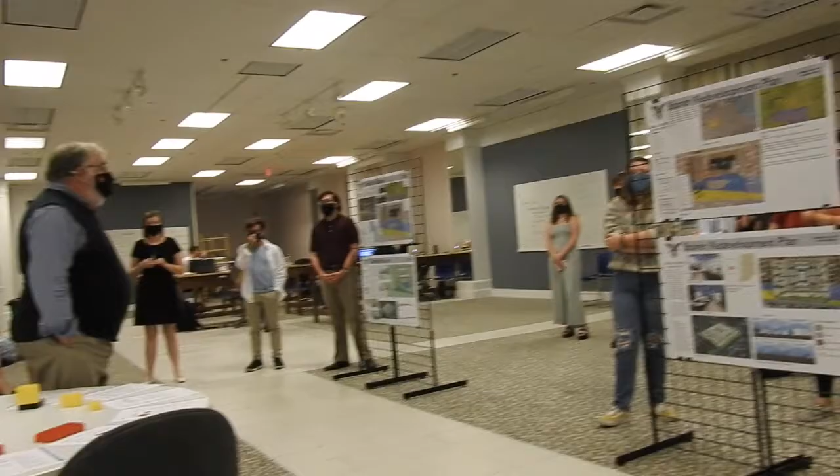The purpose of this storefront is to begin to help us as a department engage better with the community. The long-term outcome, depending on how it all works, would be to have a permanent facility where we could run both internships and employment opportunities during the semester, where students could be working on projects as well as classroom work.

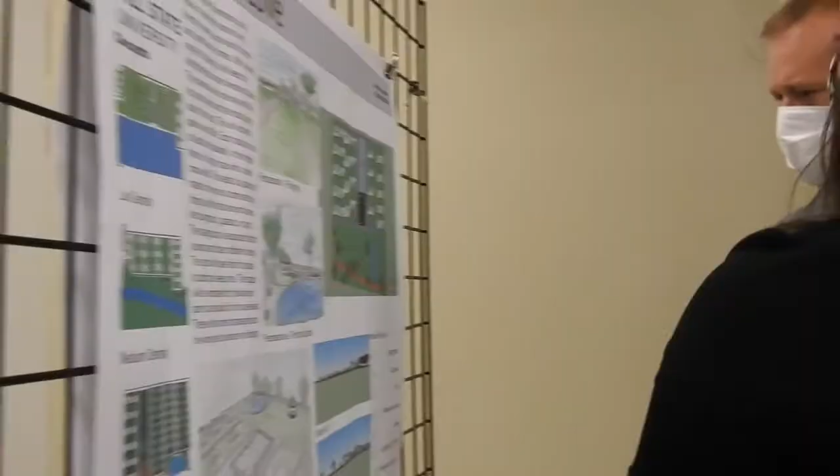The idea of this storefront, especially with COVID issues, is that it gives us a place to have larger meetings. There have been two meetings in here already, with the third one done, in which we've had over 40 people, and we can accommodate that with a safe distance approach.

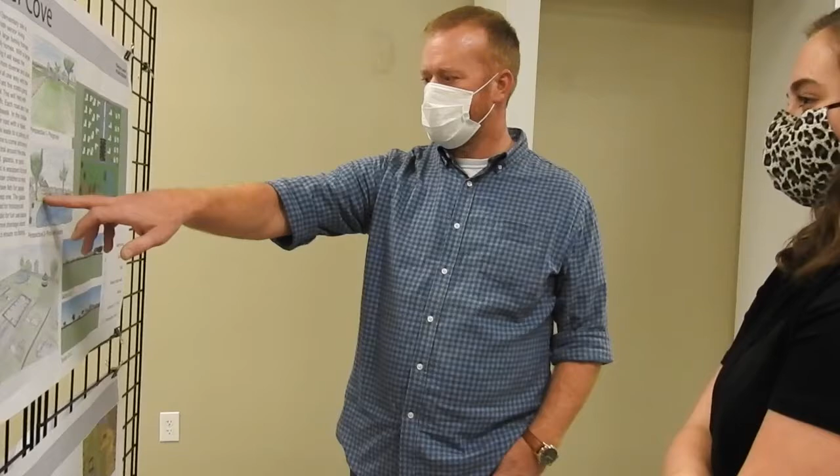We really like this facility, and it will continue to evolve, hopefully with displays of all kinds of projects, not just Ball State projects but all kinds of community projects that are underway. We want to build this as a destination for people to come and get information and learn not only about what we do, but also what's happening in Muncie.

So today, for this exhibit, we've invited the mayor and the neighborhood folks to come by. We're doing this as gallery style, which means you're standing by your project and answering questions.

Hello, my name is Elise Jones, and I am part of the PLAN202 Studio. We're going to run through the old Storer site.

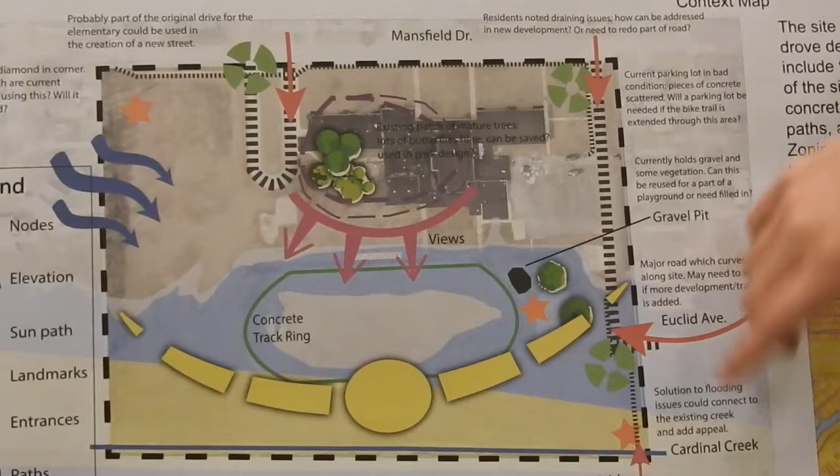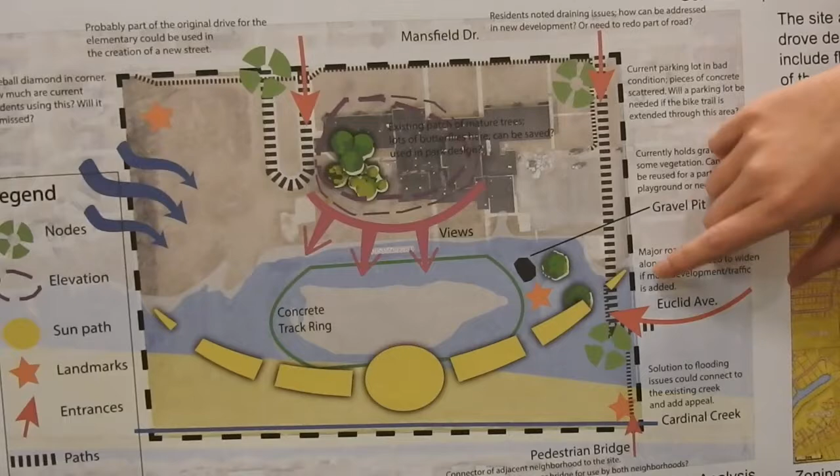Some things I found really important on the site were obviously the floodplain on the lower half, as well as flooding from Mansfield Drive. Current uses of the site include a ball diamond over here, as well as some paths along the side. Existing trees were considered for keeping or removing, and there are views of the lower elevation on the lower site here.

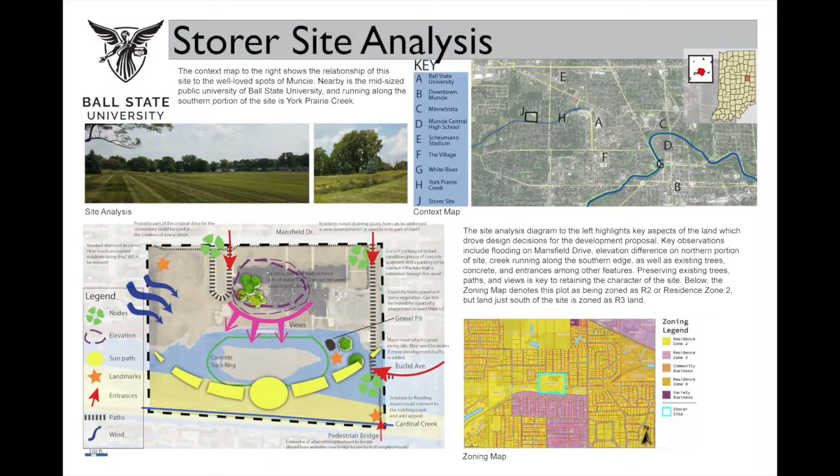Moving up to my design for my master plan, I kept all the residential homes in the northern portion just to protect them from that floodplain. To attack the flood issues on Mansfield Drive, I implemented a dry bed, two of them actually, that would run north-south and down into this retention pond.

The dry bed will be a collection of rocks and other natural plants that would soak up the water, but also take it down and completely fix that issue for current residents as well as future residents of the site. I also have a playground that would be...

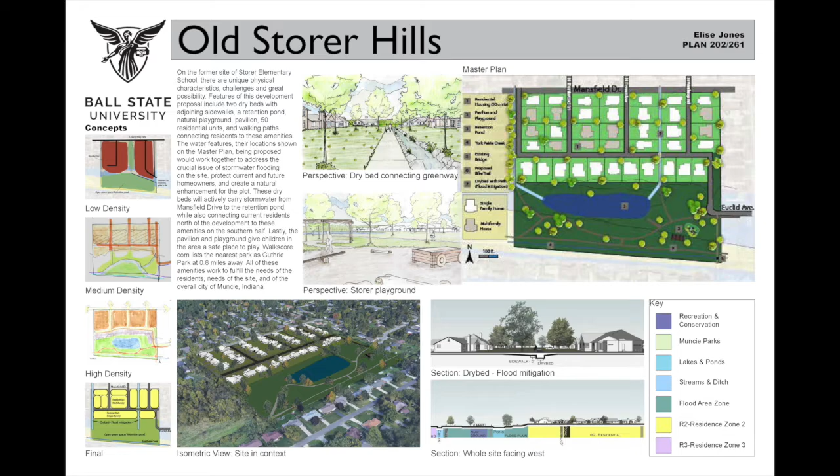...mostly natural features, kind of a natural playground, both sustainable and low budget. And then the dry bed here shows how the sidewalk borders the dry bed, leading all the way down to the southern portion of the site.

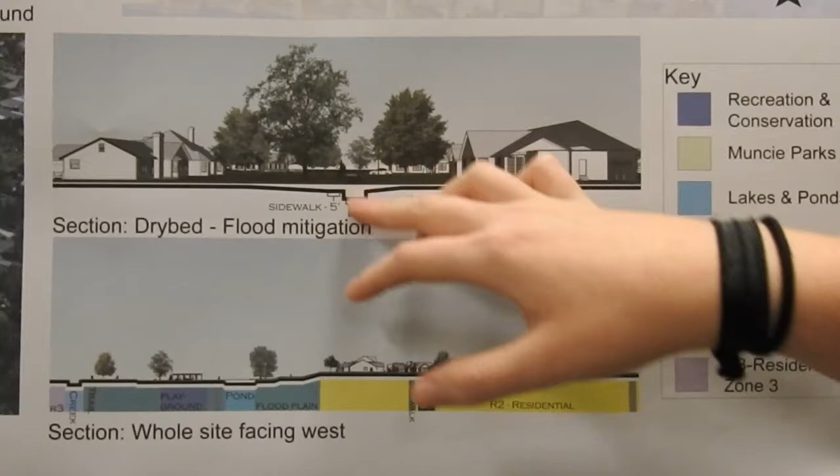There's more information here, and the elevations show how the dry bed works. It's lower, comes down, collects that water, and brings it where it needs to be and not on the street. This shows how it turns from residential down to open space for all the residents in the area.

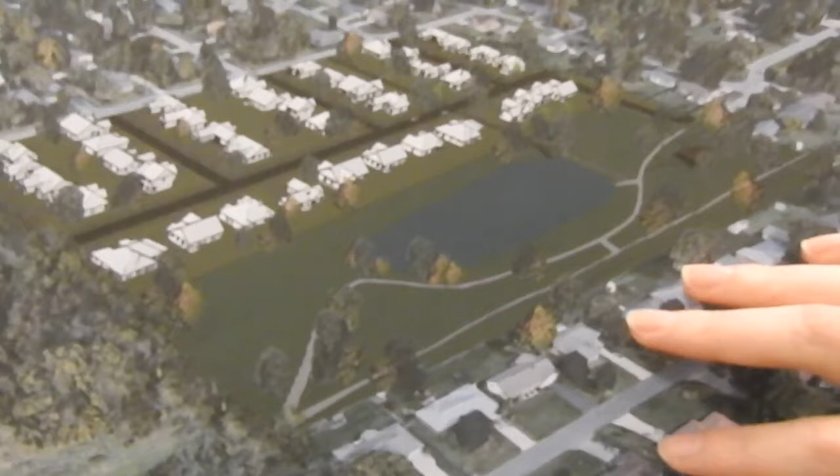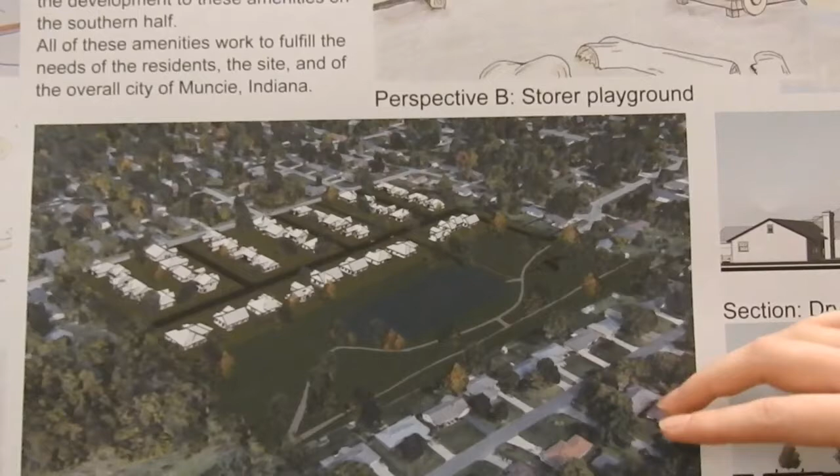The aerial here shows detail of the pond and how the residents can interact with it through the sidewalk. The houses on the northern portion stay away from that floodplain, and it matches the neighborhood while deviating a bit to try something new, but still matching the context of the site. So that was my design process and how I tried to attack current issues while also creating a new community.

Hello, my name's Enzo, and right over here is my project for the Storer Elementary site. First, I want to introduce you to the site analysis and the details of the site.

What's very important about the site is the slope, the topography, where the slope goes from high to low. Mansfield Drive is up north over here, and then the topography slowly slopes down.

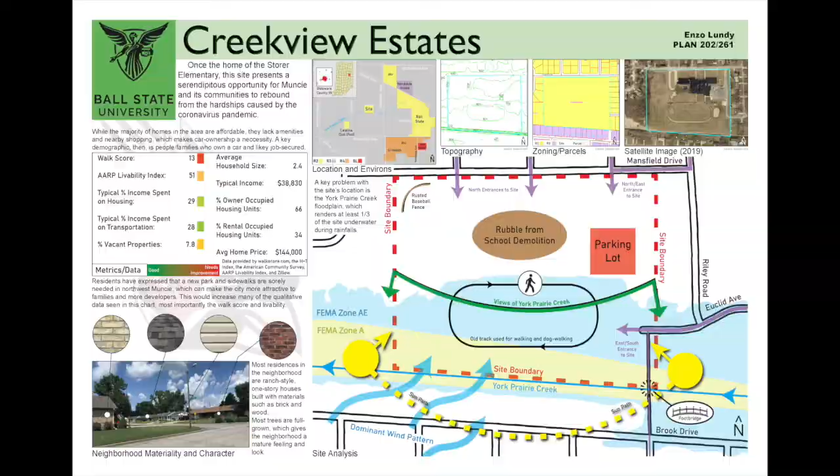A characteristic and concern that the community had was the materiality and how the development would fit into the context of the site. So I included a graphic here showing all of the elements and materials that would be used in the new development houses. Taking that into account, we'll move to our site plan.

The site plan has 24 ranch houses, a little pocket neighborhood, which I'll explain later, and a smaller scale senior living center, along with a retention pond and a neighborhood park over here.

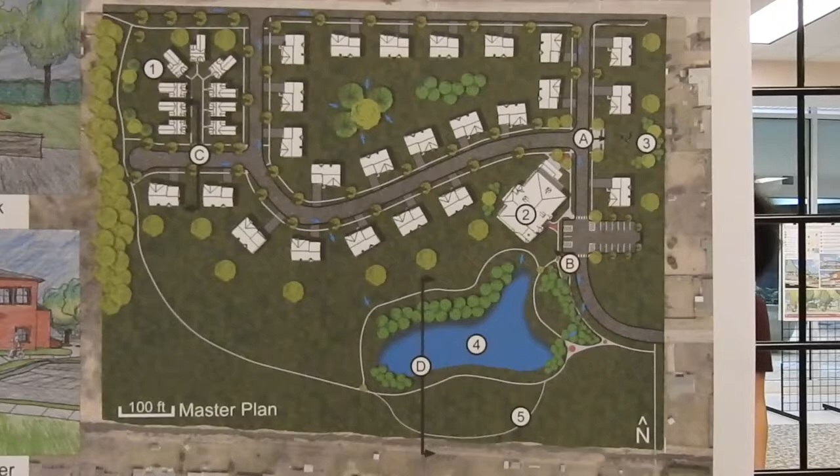And then we move into the neighborhood park over here, which would be a new amenity for the neighborhood. There is also a trail on the master plan that goes from the existing neighborhood all the way down to the retention pond. The retention pond, as you see in the plan, would catch water runoff from the new development. See the arrows.

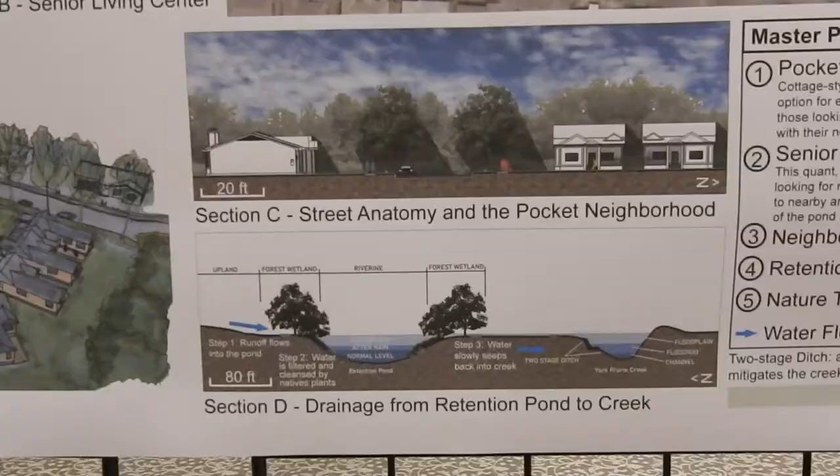And also, if we go down to section D right here, there's 3 steps to the retention pond. Step 1 is the runoff flows into the pond. It gets cleaned and cleansed by native plants that we plant there. And then the final step would be the water slowly seeping back into the creek.

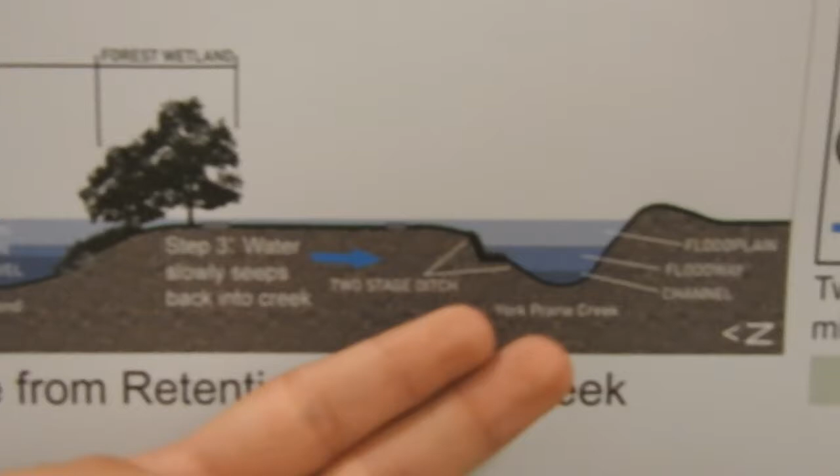So this retention pond would not only increase the property values for the development around the neighborhood, it would also take care of some of the flooding issues and problems that current residents experience.

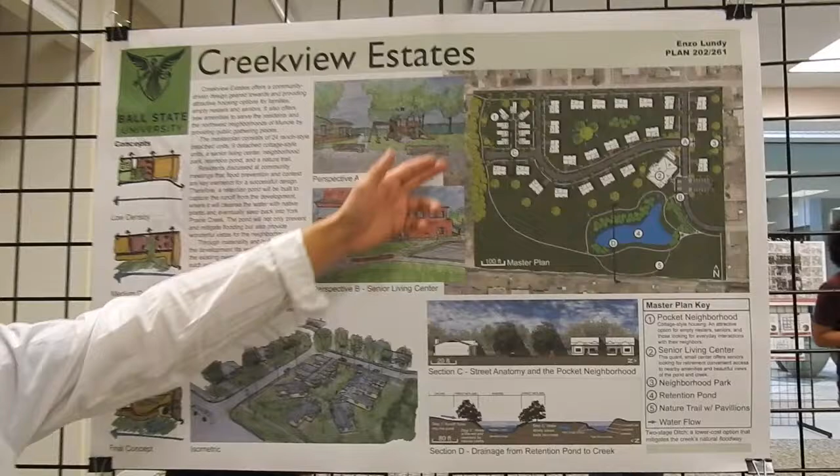The other feature that I want to note is the pocket neighborhood, as we saw. There are 9 of those small cottage-style houses. If we go down to the isometric view right here, you can see a more detailed picture. So I decided to add these cottage-style homes because they not only make the area more affordable, but they're also very attractive for empty nesters and seniors who are retired.

And these pocket neighborhoods, the best thing about them is that they give a more intimate sense of a community. And so to wrap it up, the development really does seek to provide a more intimate sense of neighborhood while giving new residents and existing residents more amenities to enjoy and hopefully live a better and healthy lifestyle. Thank you.

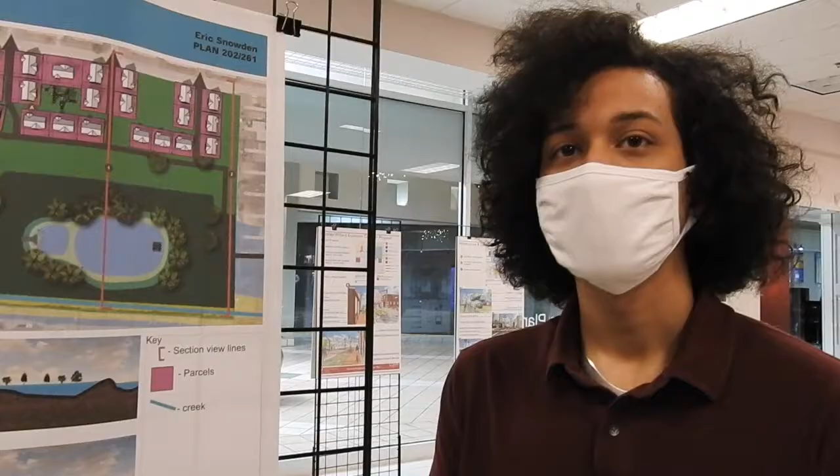Hello, my name is Eric Snowden, and today we will be looking at the Storer site.

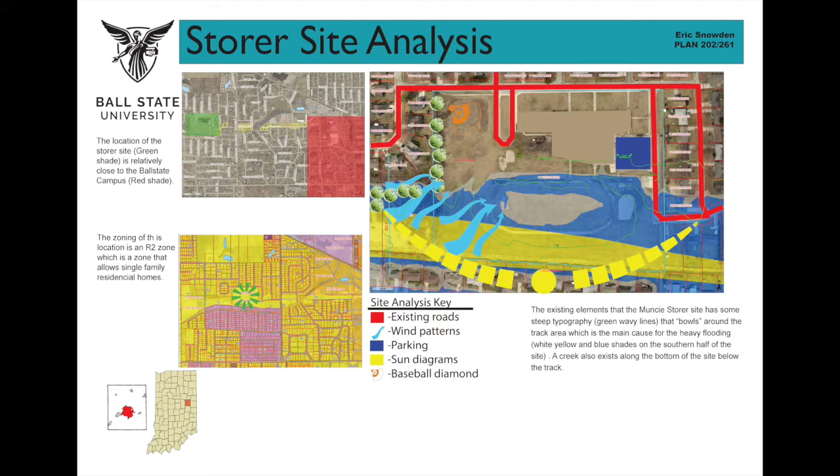So here, as you see, this is the analysis of the site as we have it now. You have a parking lot, you have the sun orientation here, and you have the wind direction blowing from southwest to northeast. And so coming up here, this is my site proposal.

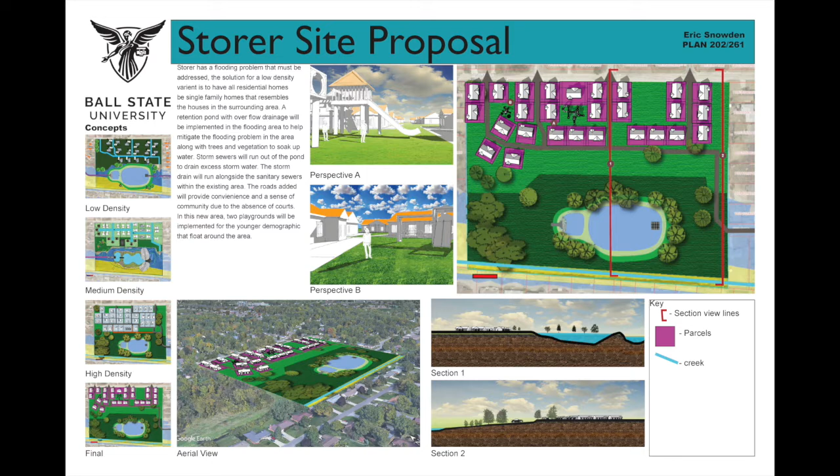I decided to go with the low density proposal with 27 units as a whole. As you can see, I have highlighted the parcels in hot pink so that it's easy to read. I have 2 parks for the lower age demographic. These houses are all single family use.

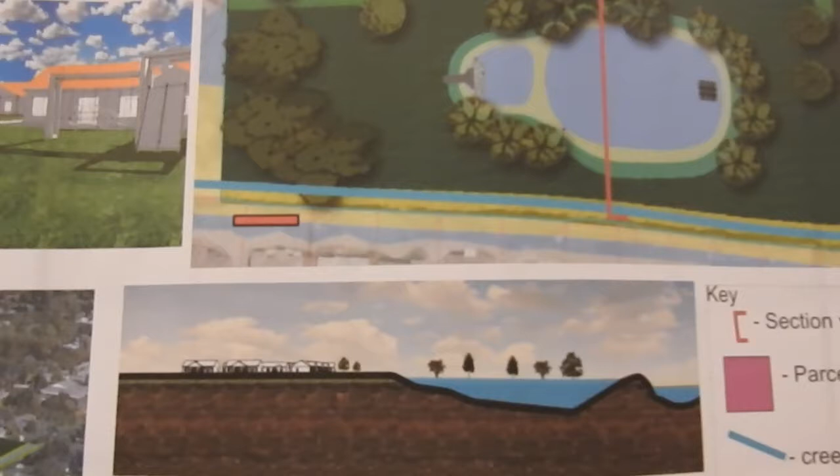And one thing to go against the flooding problem is the retention pond that I decided to add. As you can see, through this cross-section cut here in the first one, it goes pretty low, and then the cross-section goes through the creek as well, not intersecting it directly.

Trees are placed around it to help soak up part of the flooding, and over here, this is the second section, which is illustrated down here. This shows going this way, the west side.

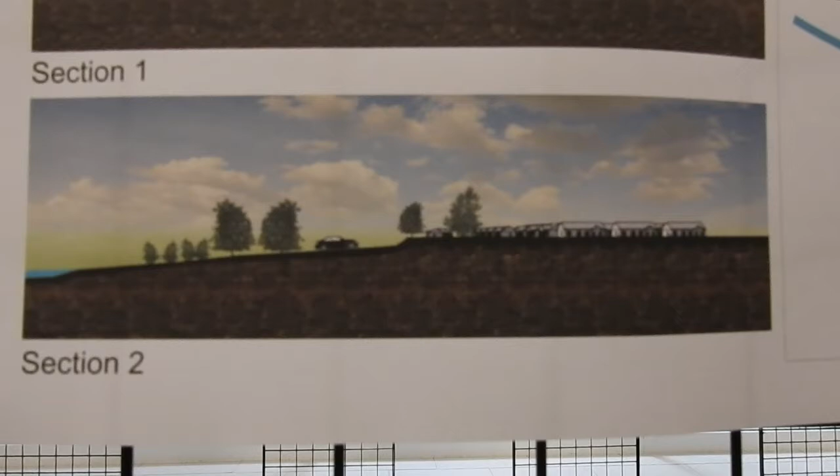And then coming over here to the perspectives. This perspective A shows a look at the first park over here in the middle. And what you can see is this is a more higher up park, so it's more of a playground, used for an older children demographic.

And over here at perspective B, this is a lower playground, so it's more used for a smaller children demographic.

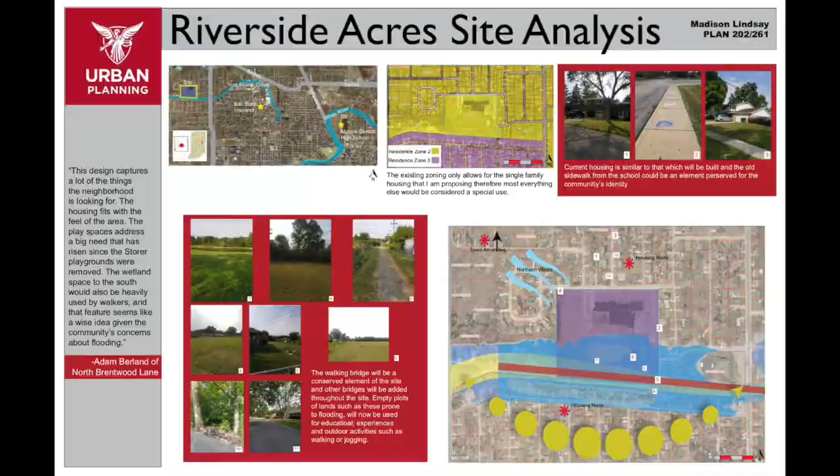So as you can see down here, I've created a marsh area to deal with that flooding, as well as a drainage solution coming down from Mansfield Road up here to go into the marsh area. I've also included some duplexes, single-family housing, and triplexes in this region.

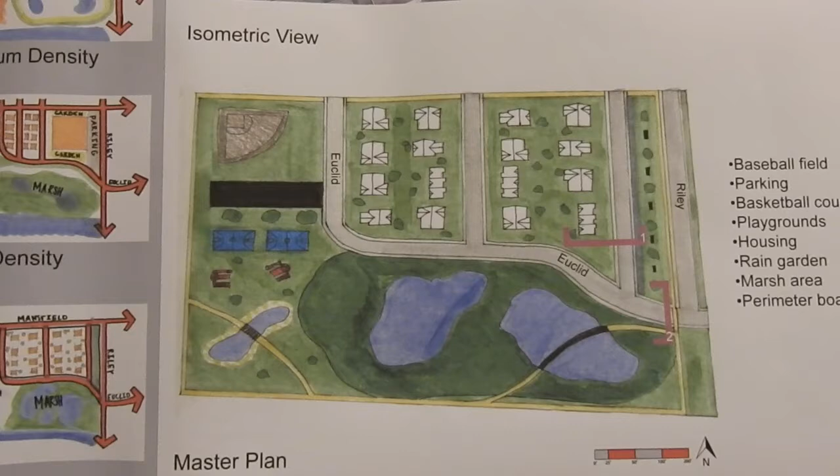And over to the west of Euclid, a baseball field with some parking for those who may not live in the neighborhood, some parks, basketball courts, and a rain garden where people may even have the opportunity to grow their own herbs and vegetables, as well as just relax and go around the design trail for the site, which flows through the marsh and rain garden areas.

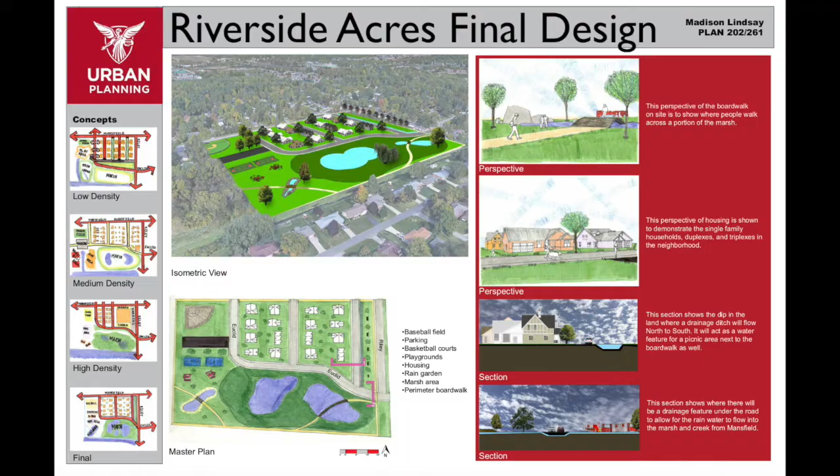I really hope the community enjoys this presentation and that they're excited about all the opportunities it may have.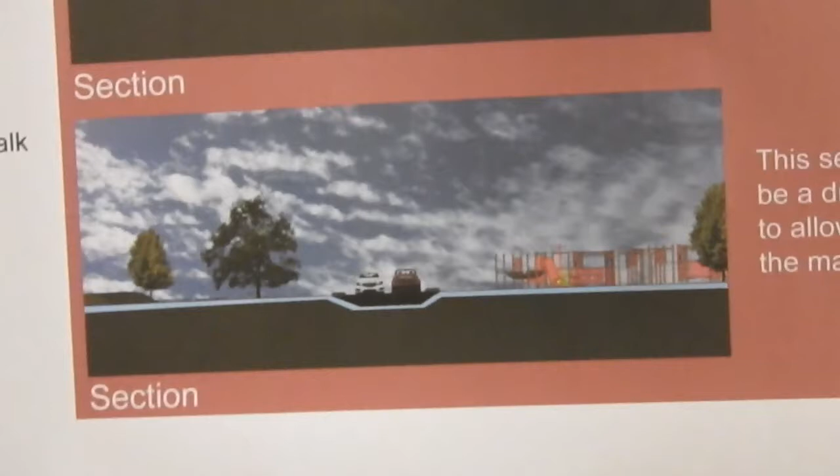These are also some more detailed drawings about some of the housing and a few elevations to show what it would look like if you were looking as if you cut into the earth onto some of the housing and the playground, and this is a street that would run through the site as well.

Thank you so much. Really good. So easy.

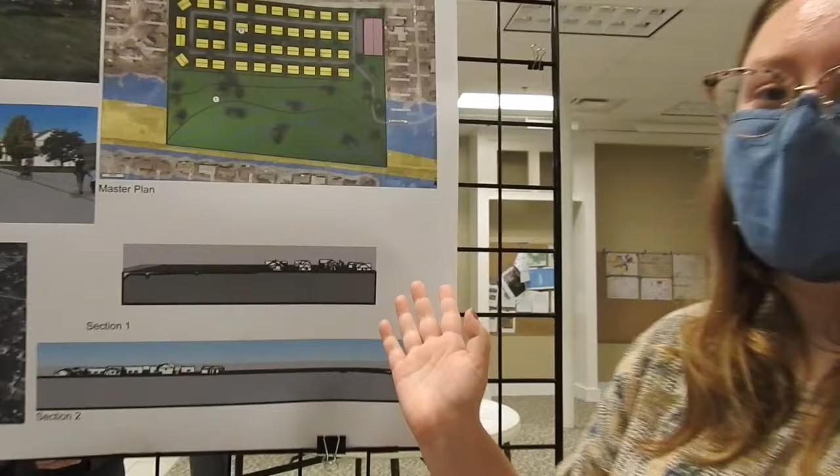Hi, I'm Lauren Doppke. I'm a second year here at Ball State University, and this is my idea of the Storer site.

A really big important part to keep in mind with this plan is this huge flooding plain right here, thanks to this river that's also runoff from Ball State University, with their Cardinal Creek and Duck Pond. This place gets flooded terribly during heavy storms because of all the runoff.

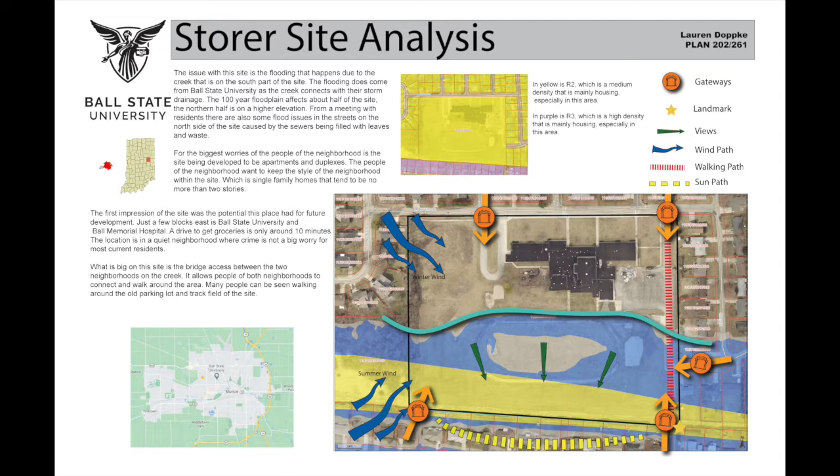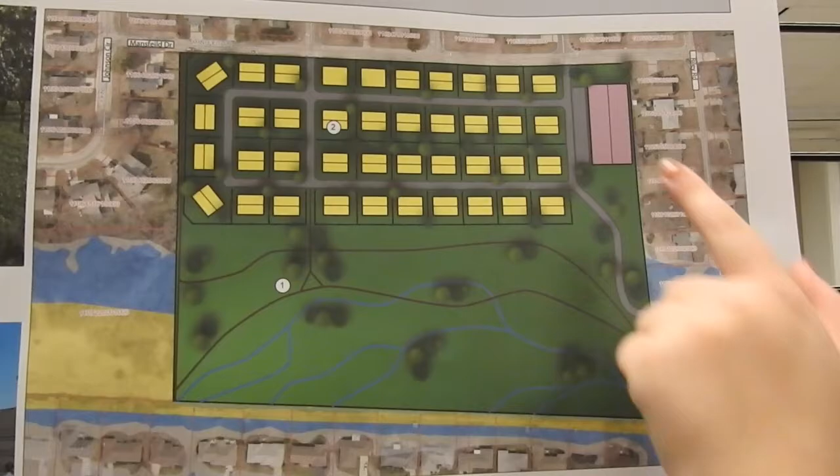Up to the plan, we've got all of this residential space, and this is single-family unit homes. It will be a medium density area, but this building right here is going to fit the neighborhood really well because it is a community building.

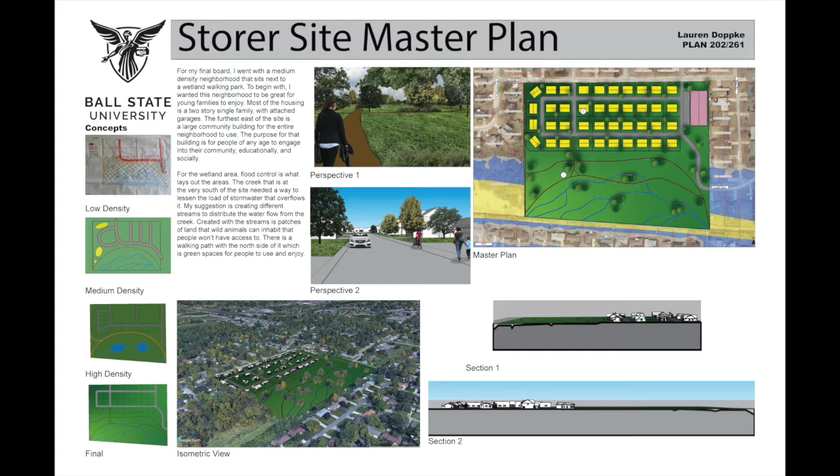See this right here, using that open space, wide openness, green grass for them to play in the field, pick anything they want to do.

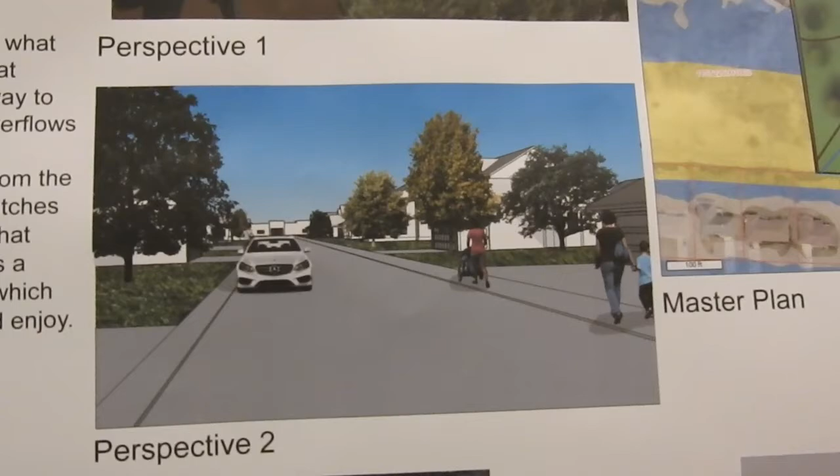Down in the residential area, you see it is pretty well spaced out. You see the little community building down there. It will be a walkable place, but you can also use your car.

You can see here, it's a pretty even spacing out. So you've got all the space for the people to live and all this space for the animals to live, to create harmony, a biodiverse area in this neighborhood.

Hello, I'm Matthew Patel, and this is the Storer Elementary site.

The site is located 1 mile west of Ball State, with the creek on the south side, Mansfield Drive to the north. Because of the creek, flooding is a big problem.

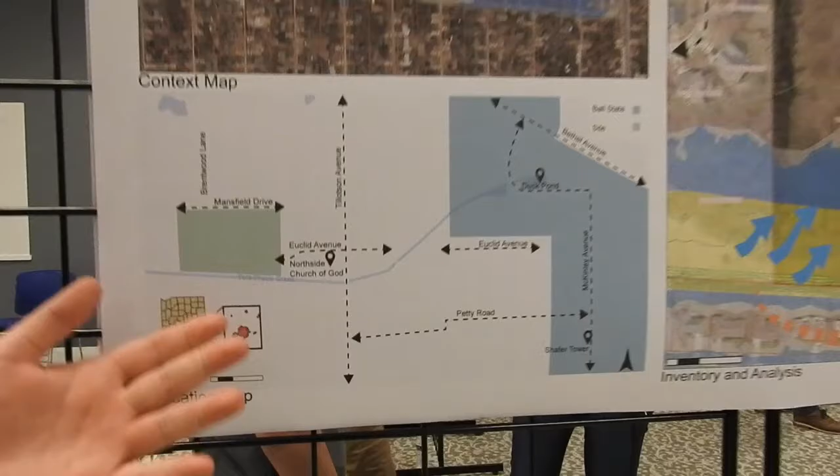The creek originates from Ball State's campus, and that's where a lot of Ball State stormwater goes. So during a rainfall event, this could get pretty bad, flooding covering nearly half the site.

To deal with that flooding, I have a wetland feeding into the creek to slow water down and store it for a while before flooding gets too bad, and a retention pond to help deal with more flooding that can encroach on the site.

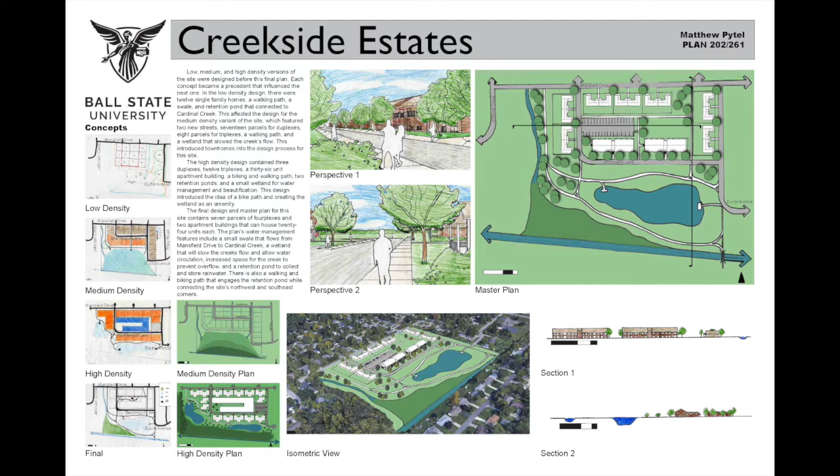So I established connections from Euclid Avenue and Brentwood Lane, and engaged the water features with a path connected from this bridge in the southeast corner up to the northwest corner of the site.

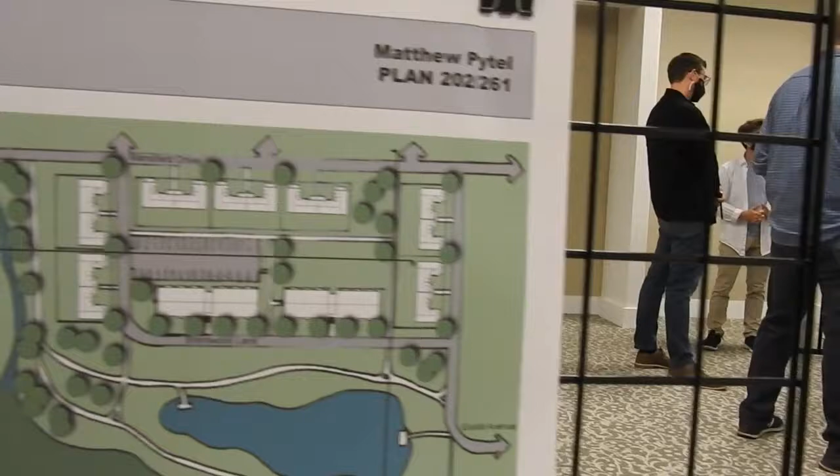So perspective 1 is located right here on the plan. It's just a view of the apartment buildings to the quadplex far in the back.

And perspective 2 is located right here. You see more quadplexes and a retention pond in the back.

Hello, so this is my Storer Elementary School redevelopment plan. To start off, I'll show you the context of where the location is.

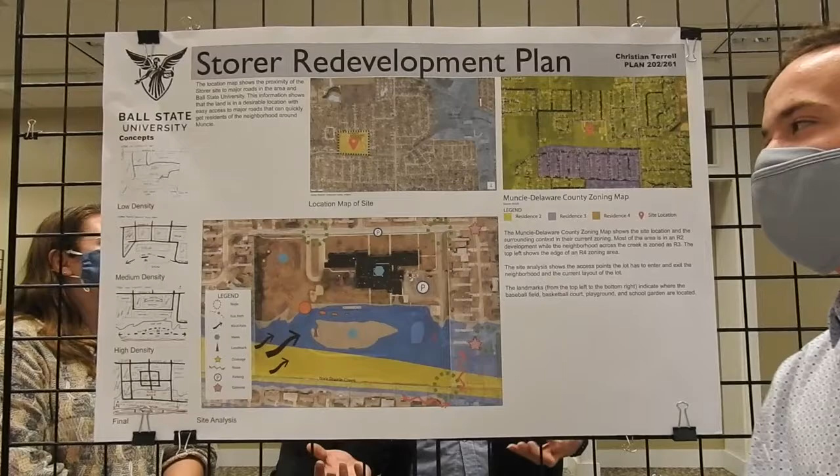It's the yellow box, and it shows a relative graph of how close it is to Ball State University and the York Prairie Creek that flows from Ball State into the neighborhood. The neighborhood is currently zoned as R2, which is low density housing.

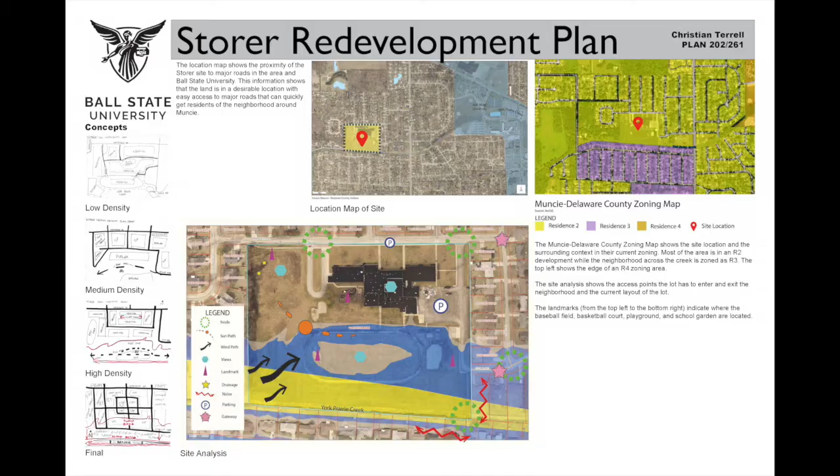To carry on to the next portion, here's my redevelopment idea. I wanted to create a central business district in the center that could offer some small grocery or pharmacy type of businesses.

Because I noticed the walkability score is rather low and everyone seems to be very dependent on their cars to get everything.

I also wanted to address the missing middle housing in Muncie. So this has apartments above it on the top 2 floors, and these are just regular apartments and row houses, and then single family all the way around.

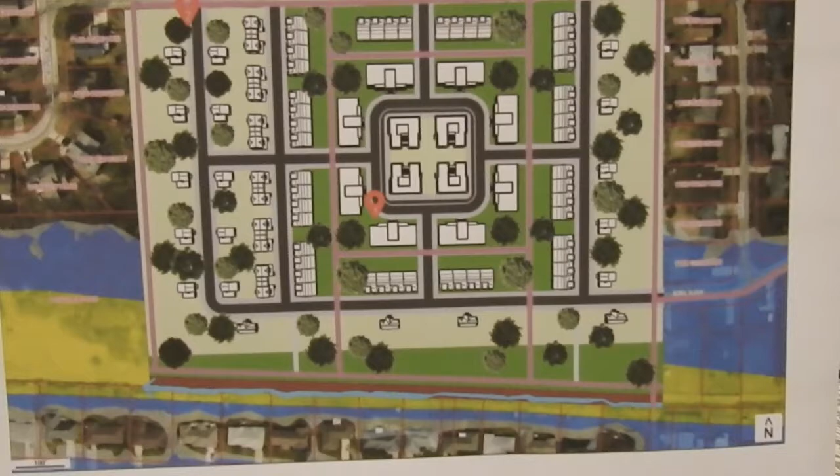The plan is to go from 3 floors down to a 2-floor or 1-floor house at the outer edge, to help it blend into the community a bit smoother than just a rough cutoff.

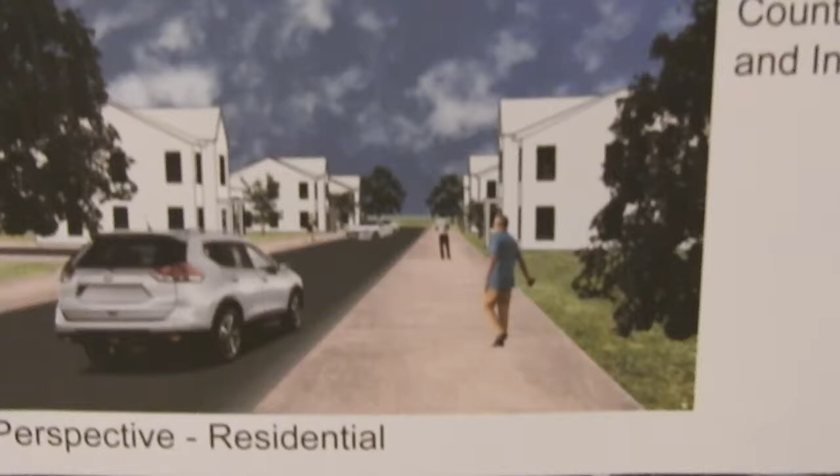You can see that from the isometric and the perspective images. So the central business district perspective up here is from an angle over here.

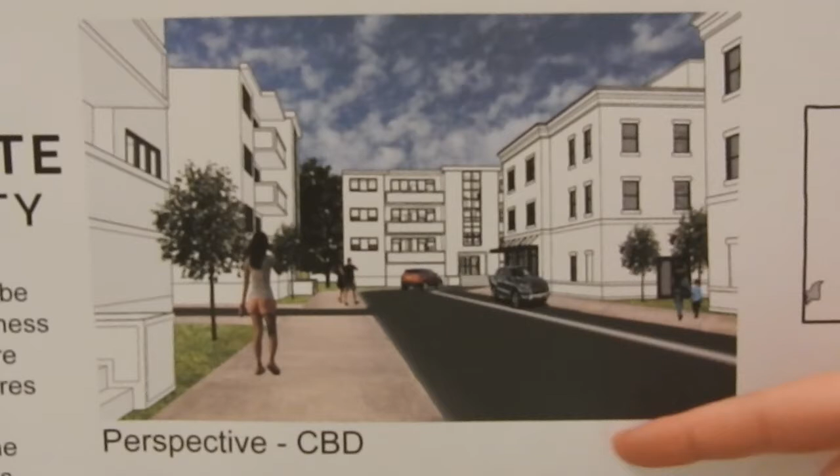It's this point, and then it just shows what the area should look like with street parking and 2 lanes of traffic and large sidewalks.

And then lower down here is what the single family housing has to offer. So it just shows you what your hopeful average suburban row would look like.

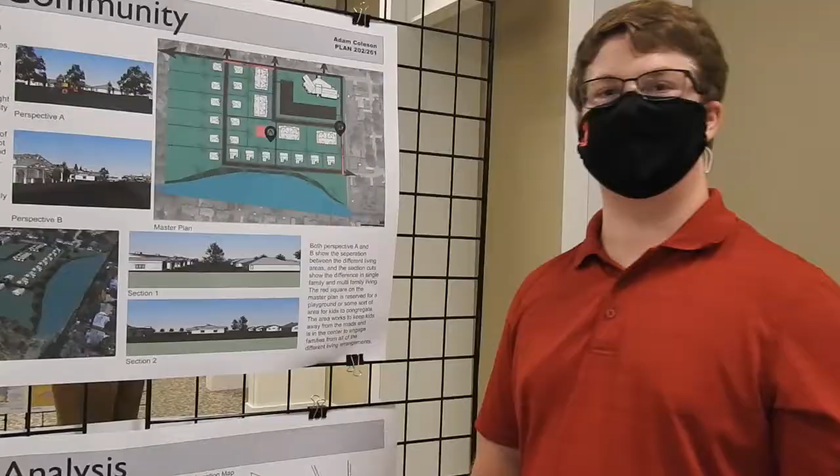I'm working on the Storer Elementary site, changing it to more of a residential community site. We start with the analysis of the site, how it is right now, on Riley and Mansfield Road and Drive. The main problem is the flooding, which you can see right here, and we'll be addressing that in the plan. There are a couple entryways on the east side of the site and one on the west side, but that's kind of closed off.

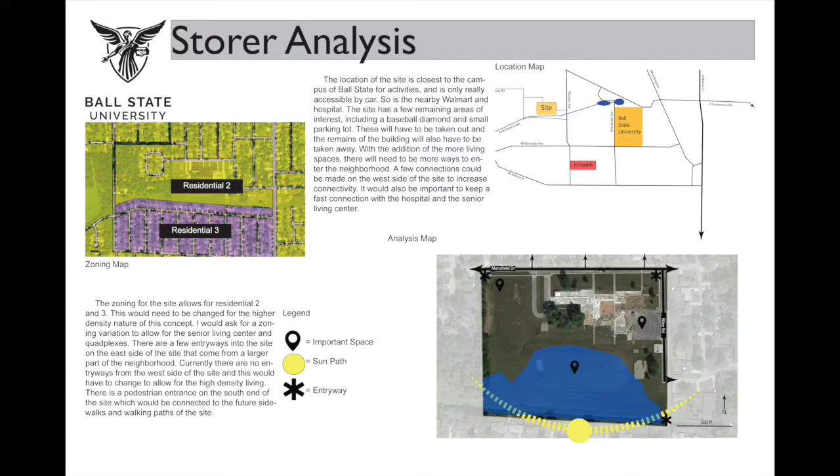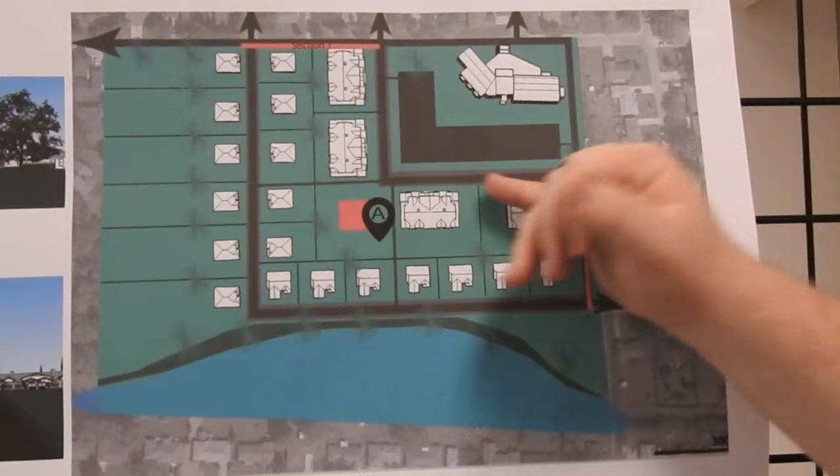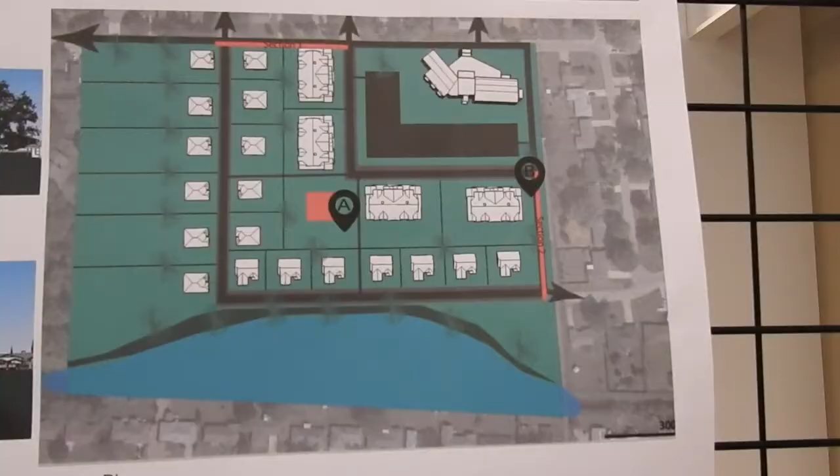As we move up to the master plan, you can see that I included many different ways of living, starting with the extension here of this road, which will include single family living. As you move in, a new entire road will have to be built here, which connects in, which will have quadplexes or duplexes for multiple family living. And then in the big area here would be a senior living facility for older folks who need it. I think it's a great way to incorporate multiple different ways of living and give a safer space and a close community area.

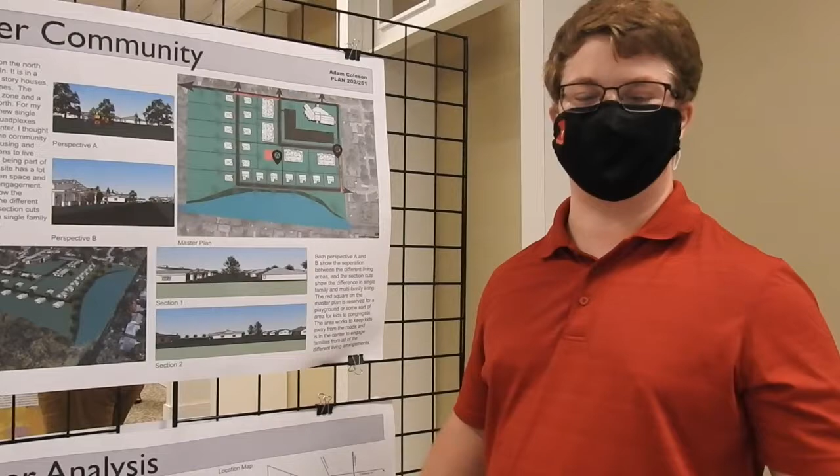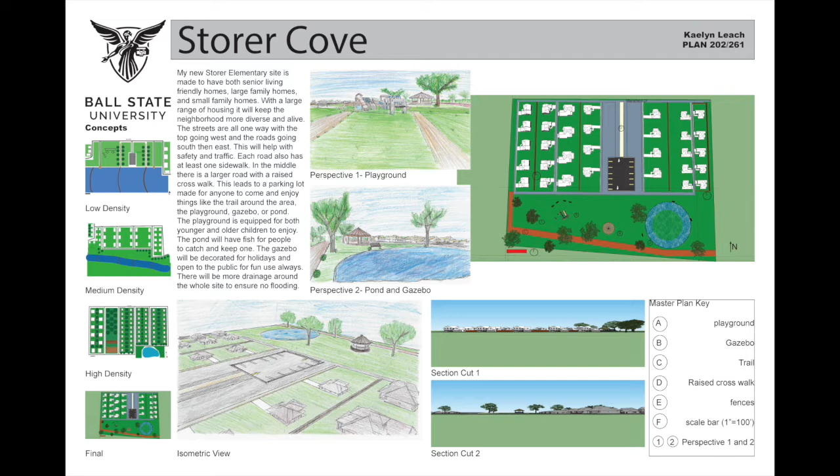I'm Kaelyn Leach, and this is my Storer Cove. From this, I decided to make these. I have about 32 homes. This is double-story family homes on both of these. These are both ranch style, and then these are single-story families. These were the fences for the different homes, just to separate it.

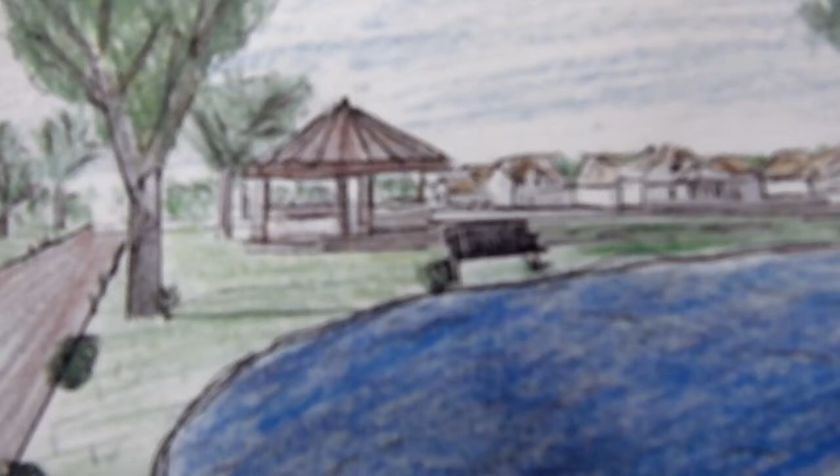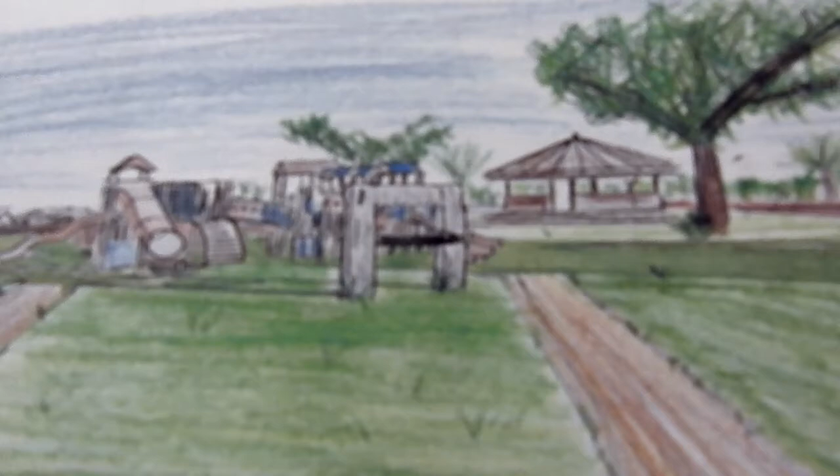Then this is my community area. I chose to do a retention pond to help with the flooding, and a lot of trees that also helped. It has seating and all that kind of stuff to help people enjoy it a little more than just flooding. I incorporated a gazebo to help with community events — there can be events that raise money, or just people enjoying the area too. And then there was a playground that I tried to make for all ages, more enjoyable for little kids and also older kids to enjoy, somewhere to go in the area that is not dangerous and fun for families.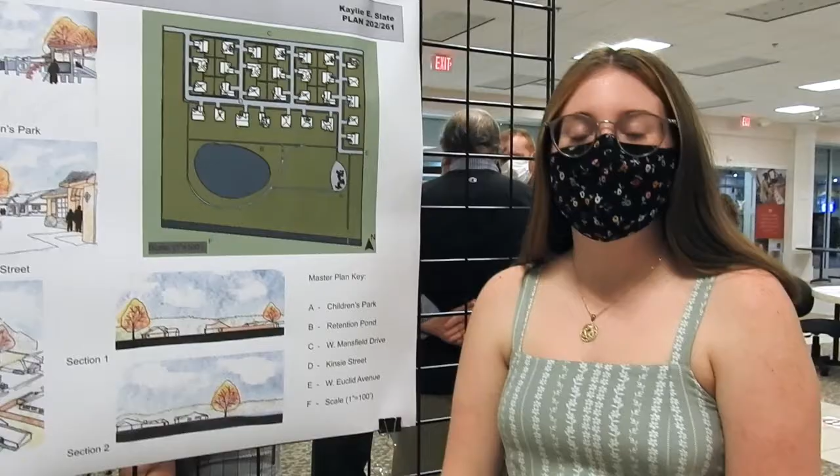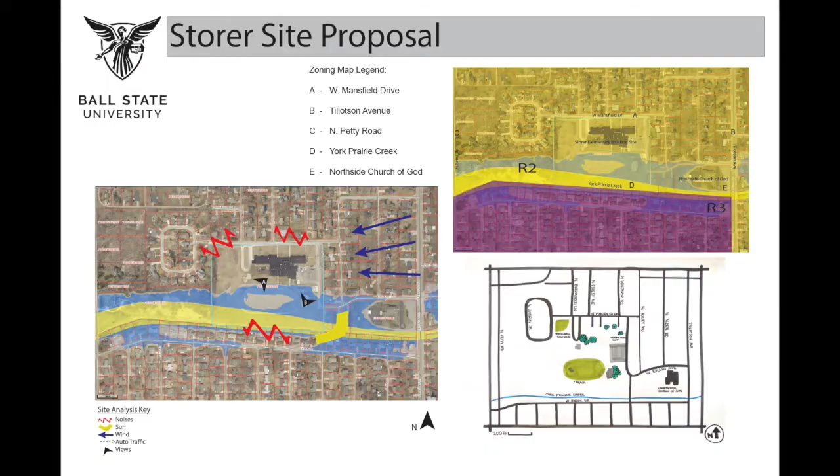Hi everyone, my name is Kaylee Slate, and this is my Storer site proposal. First off, we're going to start down here with the site analysis. There is, as you can see, a lot of flooding on the south end of the site. Therefore, keeping a green, open space and adding a retention pond is very useful in that case. The top half is very dry, which is where all the homes can be put on. Up here we have an added retention pond for the flooding.

I also went with the creek. I wanted to clean it out and expand the width of it for better water flow. I planned on adding a lot of sidewalks, not only along the streets with the homes, but also having trails around the pond and access to the children's park. With the children's park, I also wanted to make sure that it was ADA accessible.

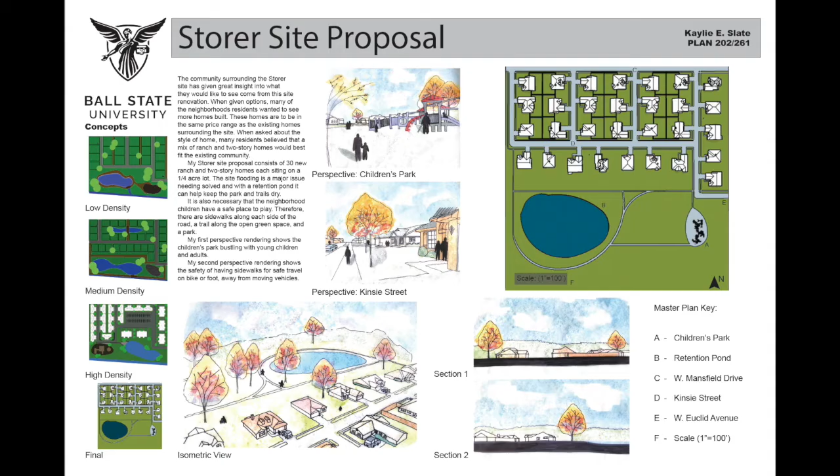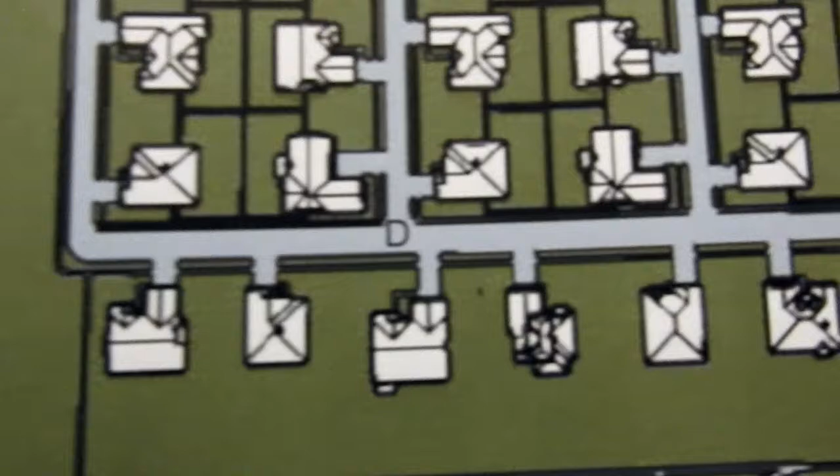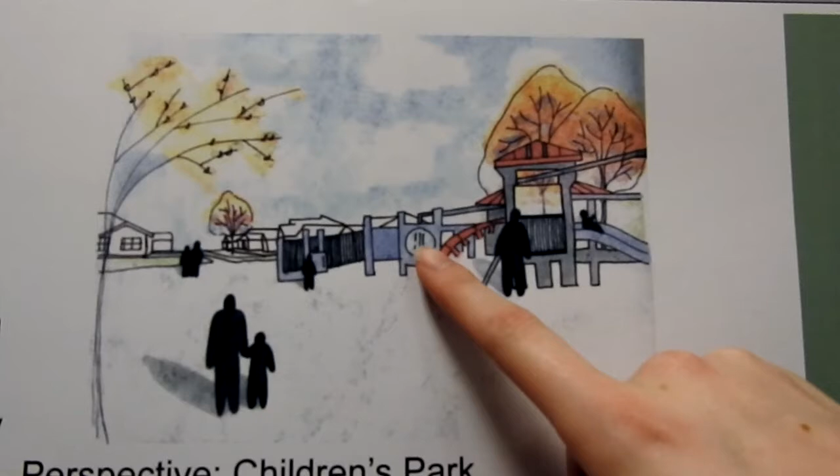Over here, that's showing you the kind of views that you'll get with those prime real estate homes. Up here, this is just a view of Kinsie Street — that is what I named that street going along right there, because that is going to be one of the main streets within this whole site. And then this is the children's park, and you can kind of see this is a ramp, so it's ADA accessible. And that is my site proposal.

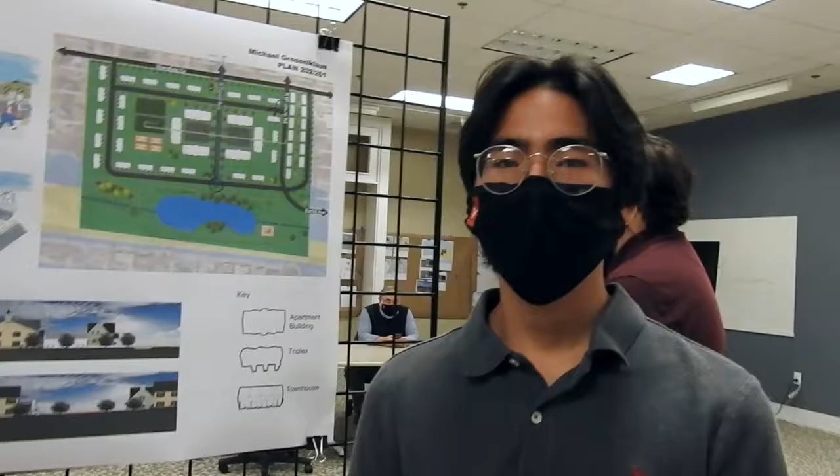I'm Michael Grosseklaus, and this is my Storer site. Right here, you can see Ball State University is about 1 mile from the site, and the site is around 18.5 acres large.

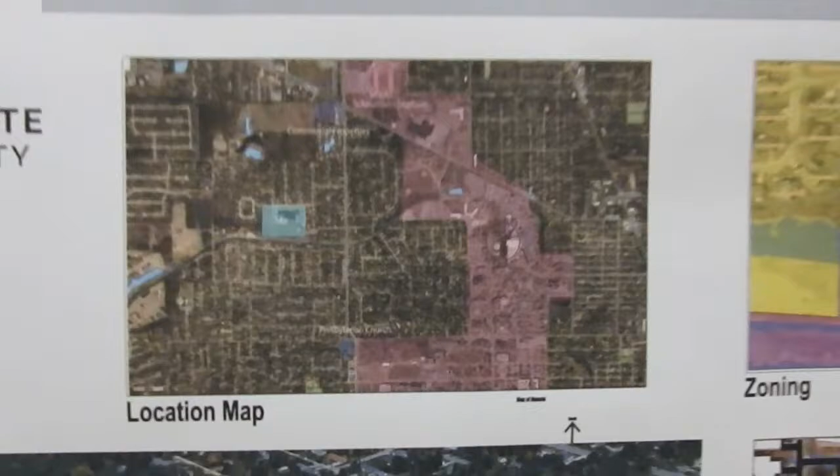On my plan, I have 24 triplexes, 52 townhouses, and 6 apartment buildings.

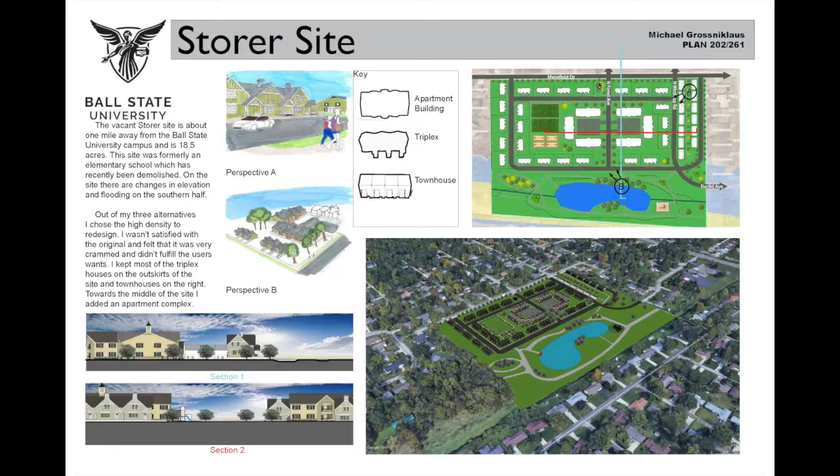For my section, I decided to go right down the middle to show how the apartments and triplexes interacted with each other. Right here you can see how they flow down south towards the retention pond.